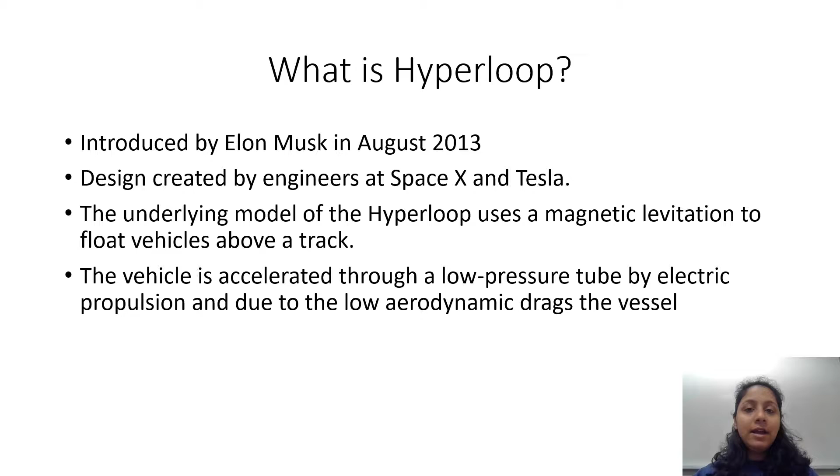The underlying model of the Hyperloop works in a way such that a capsule or a train runs inside a tube. The tube is kept at a low pressure environment by ensuring that there is nothing but vacuum in the tube. Due to low aerodynamic friction present inside the tube, the vehicle is accelerated in a forward direction using the concept of magnetic levitation. I know this sounds completely bizarre, and we all must be wondering how it exactly works. So I have a cool slide coming up next to indicate the conceptual design of Hyperloop.

We all remember watching the Jetsons when we were kids, wherein one of the persons would go inside a tube, as shown on the left-hand side, be inside the tube for some time, and is floated magically to the other side, from one destination to another. Similarly is the conceptual design of Hyperloop. Instead of a person going directly inside a tube, imagine the person is present inside a train and this train runs inside a tube.

Musk recently tweeted that this train or this particular capsule inside the tube can actually run at a speed equal to the speed of sound. I know this sounds completely bizarre, but it's actually achievable. And engineers at SpaceX and Tesla are working in order to achieve such a humongous amount of speed.

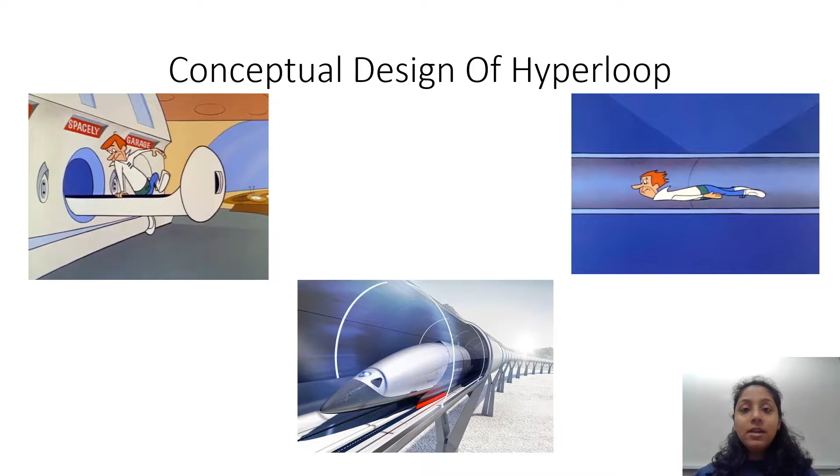One of the reasons why I decided to do a thorough system engineering analysis of the Hyperloop mode of transportation is due to the numerous advantages associated with Hyperloop. The first one is efficiency. Hyperloop claims that it is the most efficient and quickest mode of transportation available for daily commuters. Let's compare it to the other modes of transportation that are available.

How about airplanes? Let's say we want to travel a distance of 900 miles. Traveling by airplane is going to be completely unfeasible because half of the time would be wasted in the ascent and the descent of the flight. This is not practical for daily commuters like students or office-going people who want to be as time efficient as possible.

The second mode of transportation is railways. The biggest issue associated with railways is that it stops at every destination possible. Thus, let's say in a crowded place on a daily basis, if passengers travel from place A to B, ensuring that they stop at every possible place between A and B is not going to be feasible. And this is what Hyperloop claims is not going to happen with its model.

And the third mode of transportation is roads. Lots of traffic congestion in big cities like Los Angeles, California, or New York. And traveling by roads is not a better option. All these things will be avoided in Hyperloop, which we will look at further when we look at the proposed route for Hyperloop.

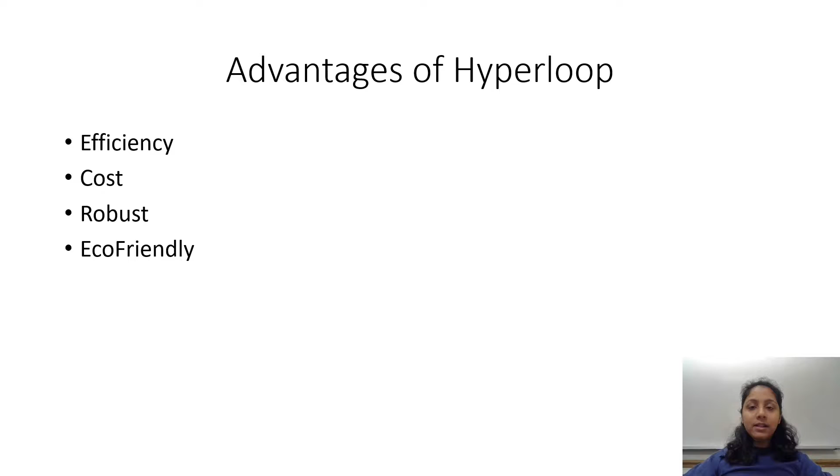And the last and the most important advantage is that Hyperloop is eco-friendly. Since it does not use any fuel for powering its system and works on the concept of magnetic levitation, it is the most eco-friendly solution that's available in the market. Also, solar panels are mounted on the tube in order to ensure that the system is up and running continuously. Now let's look at the energy consumption of all the vehicles in the United States for the year 2017.

If you look at the pie chart in the figure, we see that most of the people, or let's say most of the vehicles here, use gasoline and its distillates for their modes of transportation in order to ensure that the vehicle is up and running, which is nothing but 55% of them use gasoline and 22% of them use distillates, which is almost equivalent to 80% of the population of the entire country only surviving on fuels in order to ensure that their mode of transportation is up and running for the day, which is an increasingly and alarmingly large amount of people. What's the impact of doing this?

A lot of carbon emissions are emitted into the environment, which leads to air pollution and thereby aids global warming. It is the need of the hour to have a cleaner mode of transportation for the future. And this is exactly what Hyperloop claims. We need to consider the energy consumption for designing a transportation mode in order to ensure that it does not impact the environment and complies with nature as well.

As mentioned in the previous slide, Hyperloop works on the concept of magnetic levitation, and it does not use any fuel in order to power the entire system. Further on, it uses solar energy, which is a renewable source of energy, which it stores and consumes for the entire day in order to operate the tubes, the capsules, and the accelerators that are present inside the system. Thus, Hyperloop is one of the cleanest modes of transportation that is available.

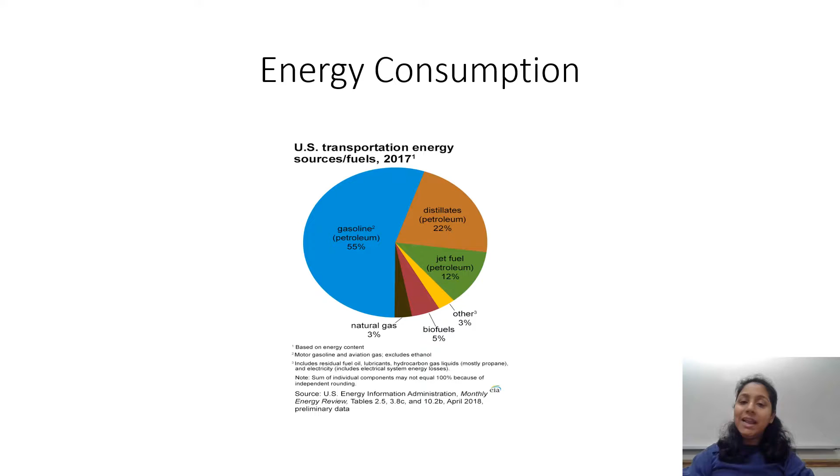I do agree that in case of an emergency, braking is going to be required within the Hyperloop. And we do have motors that will trigger this mechanical braking system. And these motors will be powered by fuels. However, this would occur in case of an extreme scenario and not on a day-to-day basis, unlike the other modes of transportation that rely on fuels on a daily basis for commutation.

Thus, as we saw in all of the previous slides, Hyperloop has numerous advantages associated with it, be it in terms of efficiency, cost effectiveness, robustness, durability, as well as being environment friendly. Thus, it is the next big thing that's out in the market. Compared to the current modes of transportation that lack certain things, which Hyperloop claims it's going to satisfy, it is the need of the hour to develop such a model of transportation.

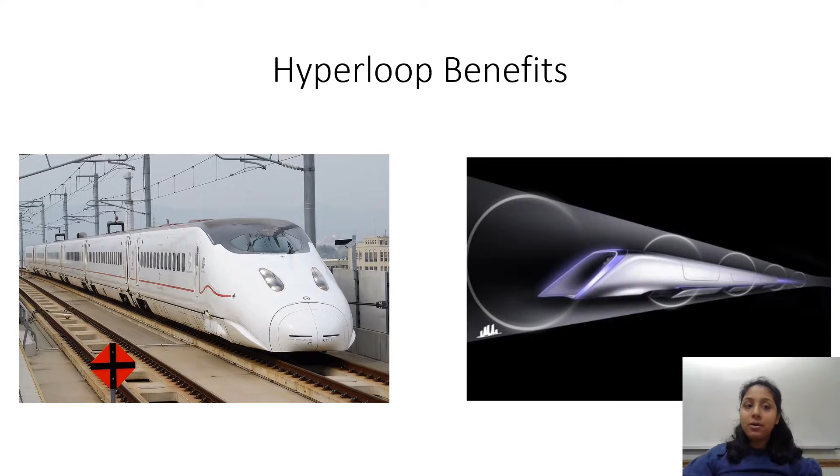Before looking at how my proposed model, Hyperloop, works, let's look at the history of ideas that existed before this model was proposed. It seems that Musk was not the first person to think about air pressure based transportation. This idea was already carved out in the late 17th century with the invention of the artificial vacuum, which led to the development of the underground transit system using pneumatic tubes for transportation.

It was observed that in the mid 1850s, a large number of cities adopted this concept of underground railway transit system with the use of pneumatic tubes. It was convenient as the system is going to be underground and it won't involve construction cost or blocking of roads above the ground level.

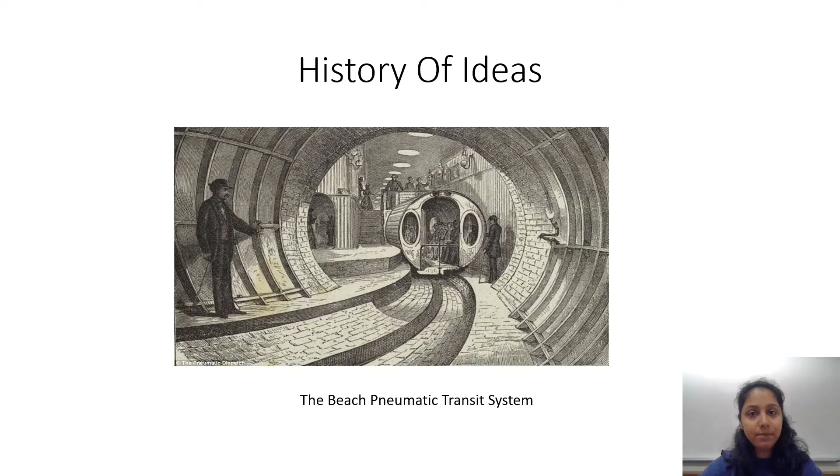In the year 1910, another scientist named Robert Goddard theoretically designed a train that will travel inside a vacuum tunnel.

As you can see in the image, there's a sealed vacuum tunnel which is used to transport a train within the tunnel. He claimed that people can travel from New York to Boston in around 15 or 20 minutes via the solution. This was just a proposed idea, it was never implemented. However, it used a concept of vacuum inside a tunnel as well as pneumatic underground transit system.

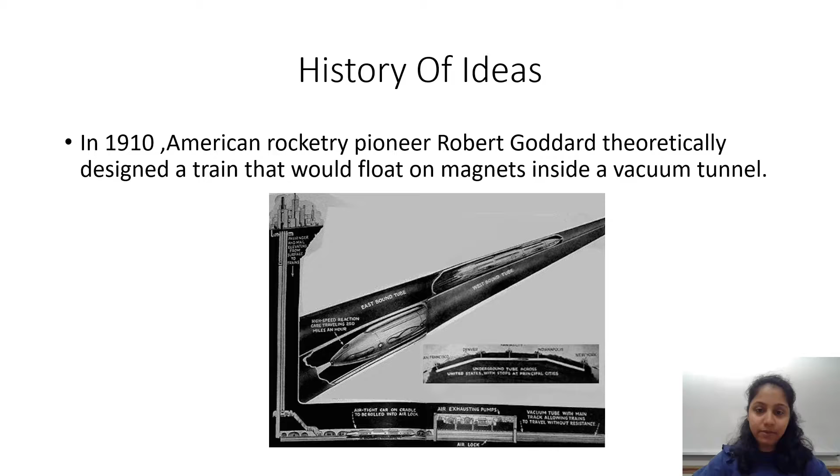If you look at the next slide, in the early 1990s as well, there were researchers at MIT who designed a vacuum tube that runs on a magnetic track. They estimated that this vacuum tube can travel from New York to Boston in around 45 minutes.

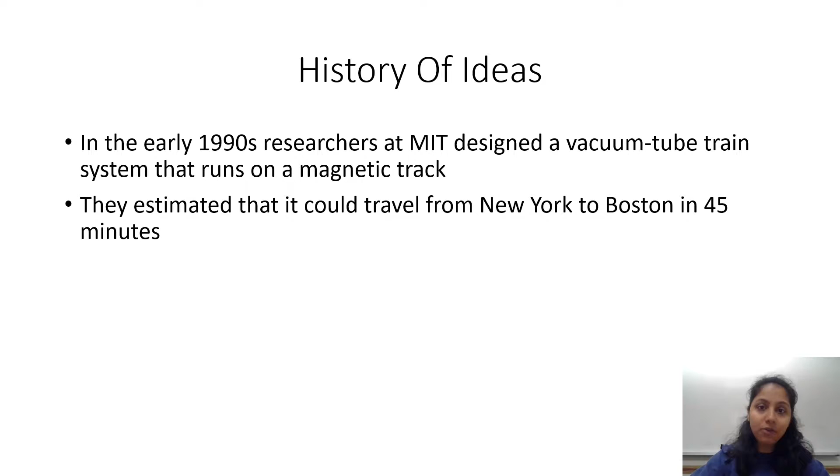In the year 2000, Hyperloop's closest sibling, ET3, came into picture. As you can see in the image, it consists of a car-sized capsule or a passenger vehicle that runs inside a tube which is around 5 feet in diameter, which runs on a frictionless magnetic levitation surface. The linear accelerators which are present beneath the tube, along with the low aerodynamic friction that's present inside the tube, will ensure that the capsule moves forwards.

There are also airlocks and air gaps present at the stations in order to ensure that the motion of the capsule inside the tube is smooth and without any pressure on the passengers present inside the capsule.

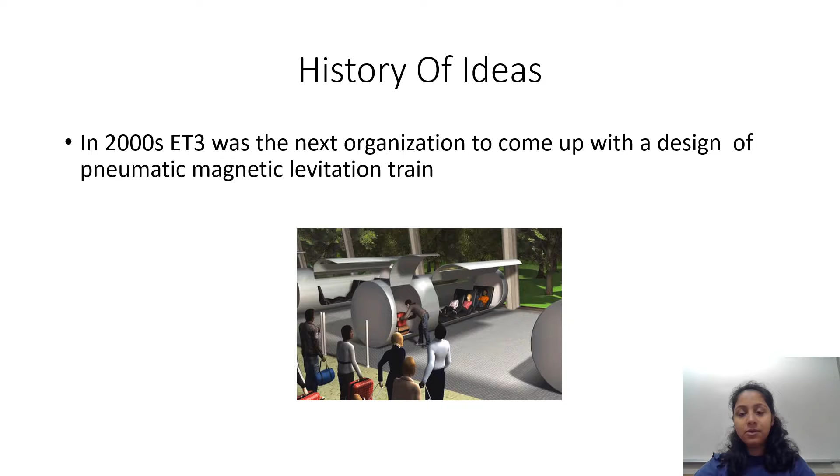The final proposed idea was that of the food tunnel system in the United Kingdom. This idea was proposed in the year 2010, which was an underground system based in the United Kingdom in order to transport the food from one location to another. It was just a proposed idea and it was never implemented. However, it is somewhat similar to the pneumatic transit systems that are present underground. Instead of transporting passengers, it is used to transport your canisters of food.

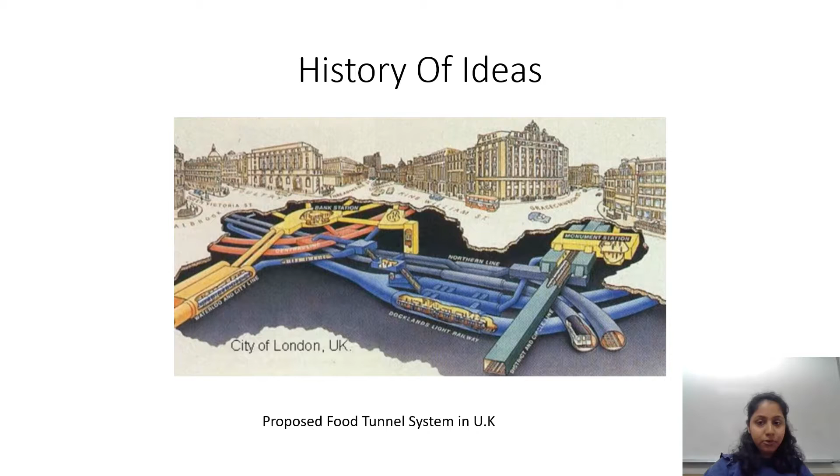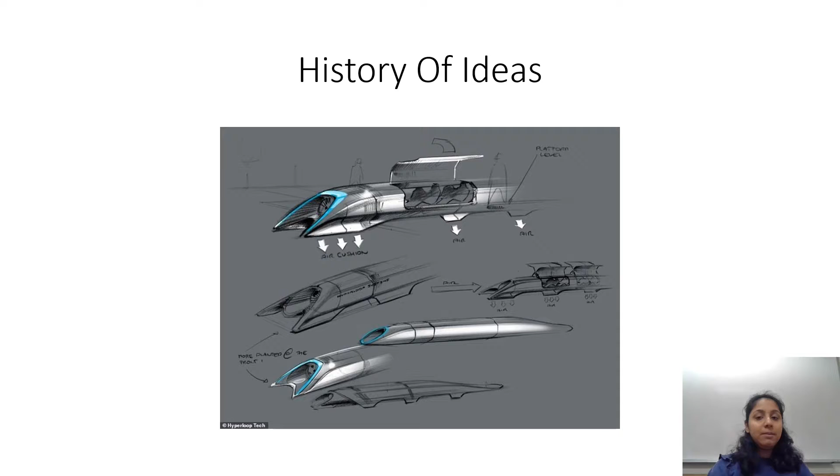Later in the year 2013, Elon Musk published his white paper about his idea of Hyperloop. He claimed that around 28 people can travel in a capsule, which is shown in the figure there, and claims that this capsule can travel from New York to Washington, D.C., and ensure that the passengers reach in about 29 minutes.

The other one is the propulsion system. This system ensures that your capsules, which are present inside your tube, move in a forward direction. It makes use of your accelerators and the concept of magnetic levitation. Your last system is that of a transport system. This system is nothing but your tubes, which contain your capsules and move it in a forward direction. These tubes are huge and need to be erected over a larger area and need to ensure that they are durable and reliable as well.

Thus, your entire Hyperloop model consists of your four systems. Each of these four systems consists of the individual components. Let's look at the mechanical components of your drivetrain capsule system. Your capsule system will consist of compressors, your power system, your air bearing, and your coolants.

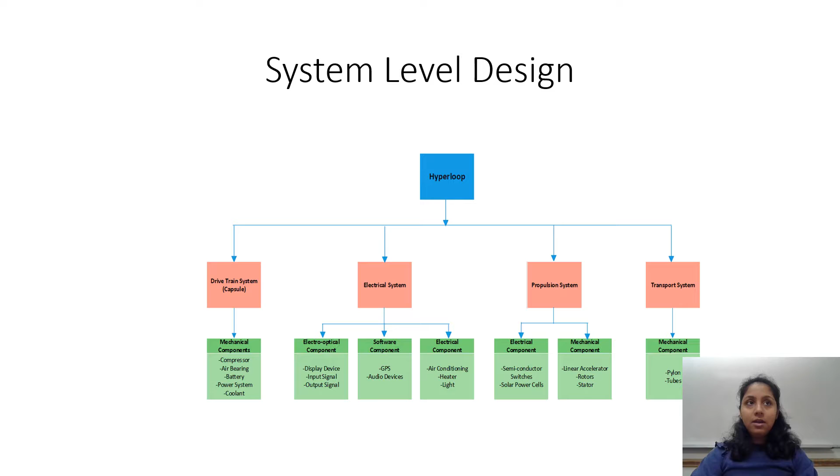Let us now have a look at the first functional system, which is nothing but the drivetrain system. This is your capsule, which is present in the Hyperloop model of transportation. This capsule is used so that passengers can sit within it and it's safe and travels at a very high speed. There are two types of capsule that have been proposed by Hyperloop. The first one is the Hyperloop passenger capsule, and the second one is the Hyperloop passenger vehicle capsule.

What is the difference between both of them? The first one will only transport your passengers, and the second one will transport your passengers along with your vehicles. In case of a Hyperloop passenger capsule, let's say you are during a rush hour. The minimum amount of people that can travel in a Hyperloop passenger capsule is around 28 people. Let's say during rush hour there are going to be 840 people that are going to travel. Thus, in order to think about density and number of people in a crowded area, we will need around 40 such Hyperloop passenger capsules to travel.

Also, let's talk about the air pressure that's present inside the capsule. How does this capsule move at such a high speed? It is similar to the concept of your aeroplanes. When an aeroplane is at a higher altitude, it's present in a low pressure environment. This low pressure environment ensures that there is very minimum drag and it moves at a faster speed. Similarly, the capsules will be present inside a tube which is maintained at a really low air pressure.

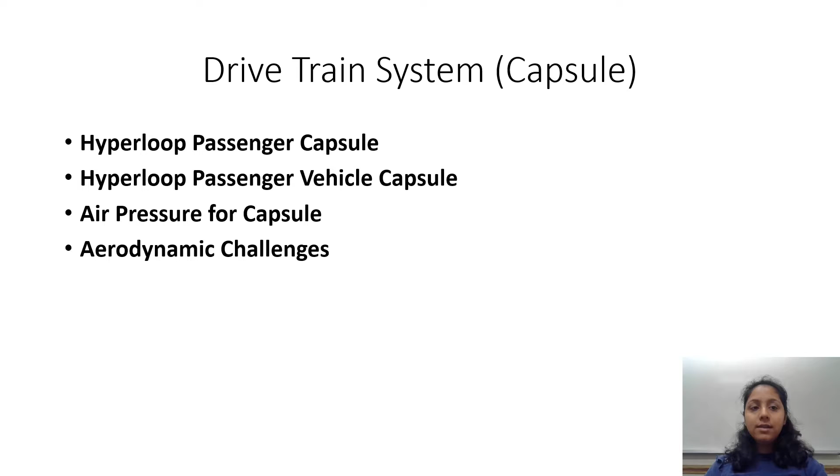However, one thing that we can notice here is that it is completely impossible to have a perfect vacuum or no air pressure. This needs to be addressed. As well, when we are near cities, we can't have the capsule moving at an extremely high speed and we need to lower the speed during such scenarios. This is one of the aerodynamic challenges that is present for a capsule when it nears small cities or big cities.

Let us now look at the model of a drivetrain system. It consists of five important aspects. The initial one is the front section, which is nothing but the inlet. The second one is a compressor. The third one, which you can see in the middle, is nothing but the seating area. The fourth one is nothing but the suspension, which is beneath the capsule. You can see it's down. And the last section is nothing but the batteries, which is at the utmost right hand side.

So, what makes a capsule such a fast and efficient mode of transportation is ensuring that the frontal section of the capsule is minimized. As you can see, the frontal section of the capsule is narrow and it's minimized. And how does this work basically? When your capsule is running at a very high speed inside a narrow path or a tunnel, any incoming air will be ingested by a compressor fan, and it ensures that there is minimum drag or pressure and it travels at a higher speed. The justification for why a compressor fan is used inside a capsule will be mentioned in a short while.

If you see, there are seats present in the middle section. These seats are designed in such a way that even during high speed transportation, the comfort of your passengers will always be met. At the same time, you can see suspension and batteries in the end section.

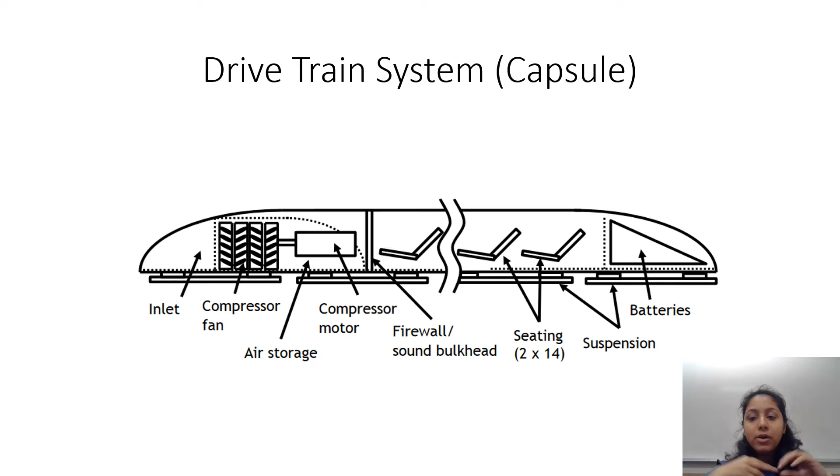You need to always ensure that the frontal area is minimized so that it can navigate at a really high speed. If you look at the bullet trains in Japan or any fast moving mode of transportation, the frontal area in such models is always minimum or towards a pointy edge, so that when it's traveling at a really high speed and cutting through air, the air pressure released in a low pressure environment can be minimized by using a compressor motor and can be used for supporting the entire vehicle. And that's the same concept that is being used for the capsule drivetrain system here.

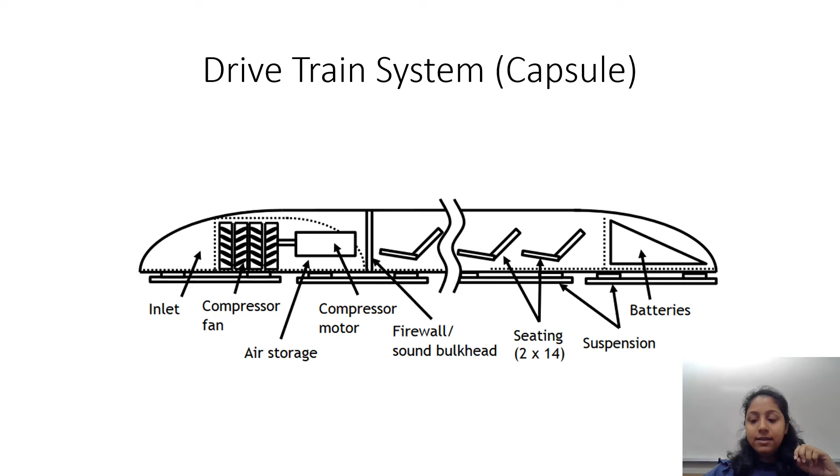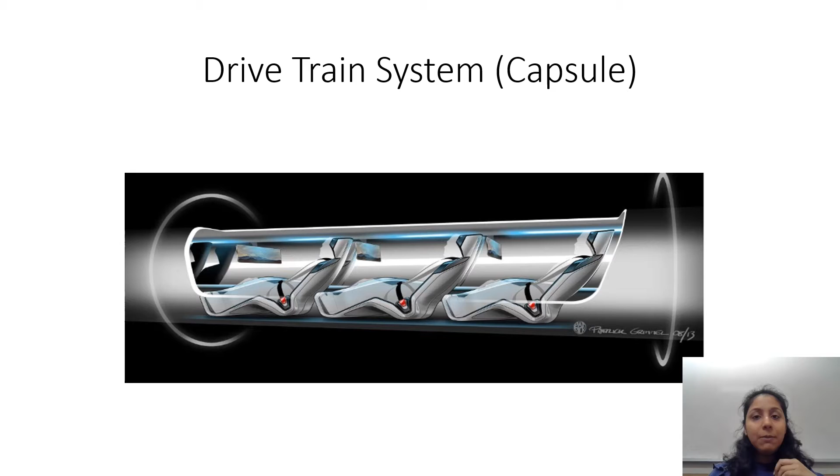Now let's discuss the propulsion system. The propulsion system is responsible for transporting the capsule from one destination to another inside a tube. There are four stages in a propulsion system. The first stage is when the capsule needs to move from a speed of 0 to 300 miles per hour when it takes off from a source. The second mode is to keep the speed of 300 miles per hour in case of an ascent. The third one is to increase the speed from 300 to 760 miles per hour for high speed transportation. And the fourth mode is to reduce the speed from 760 to 300 to 0 miles per hour when it reaches a destination, which is called deceleration.

So, how does it achieve this acceleration and deceleration? It is via the use of linear accelerators. And again, the question arises as to why we use a linear accelerator. The first reason is because these accelerators ensure that the capsules are lightweight, it caters to smaller dimensions of the capsules, and also ensures that the production cost is low. So if you see in the diagram, we use two kinds of linear motors: one for the outgoing train and one for the incoming train. These are backed up by switches, which are semiconductor switches, and these switches are backed up by solar power cells.

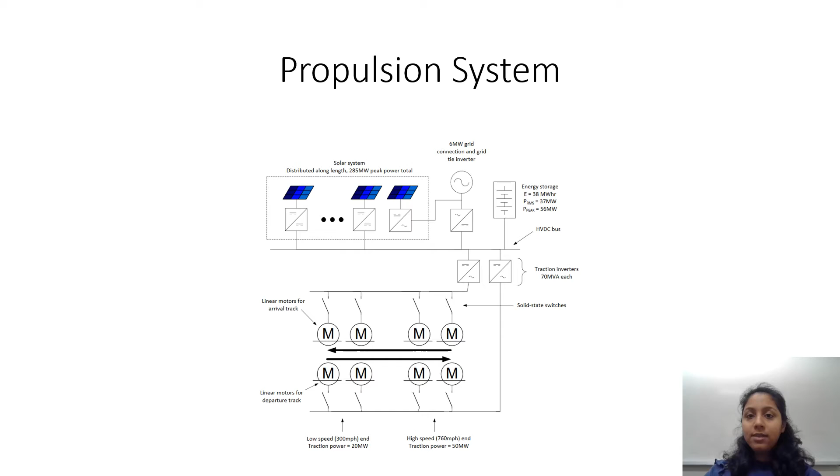The question arises as to why we use these switches. Because we're being energy efficient here. You will only power that part of the track where the capsule is currently moving. So only the solar cells belonging to that part of the track where the capsule is currently moving will be used, and hence we use semiconductor switches for it, which is a very clever and cost efficient trick for saving energy as well.

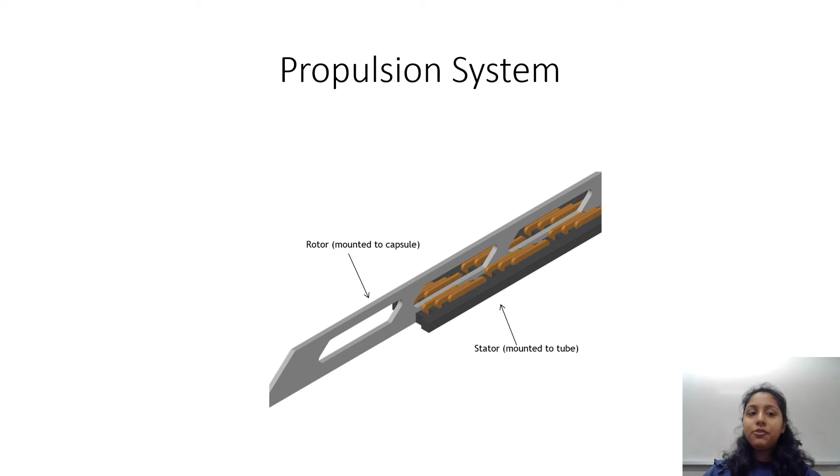Let's look at the interior working of your linear accelerator. It consists of two things. One is your rotor, which is mounted on the capsule. Then there's a stator, which is mounted to the tube. And the trains run between these rotors and stators. There's an air gap, as you can see, between both of them, which induces electromagnetic induction, which further produces your magnetic levitation.

Let's talk about the third system, which is the tube system. The tube system is used to contain your capsules. It is claimed that the pressure inside the tube system will be one-sixth of the pressure present on Mars.

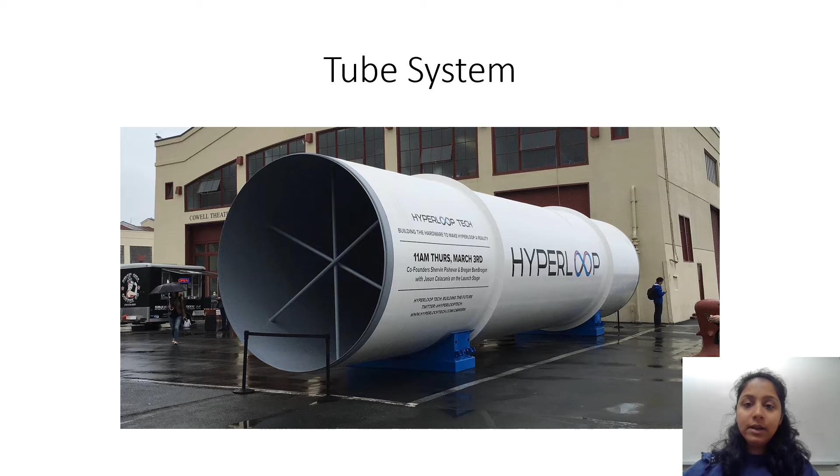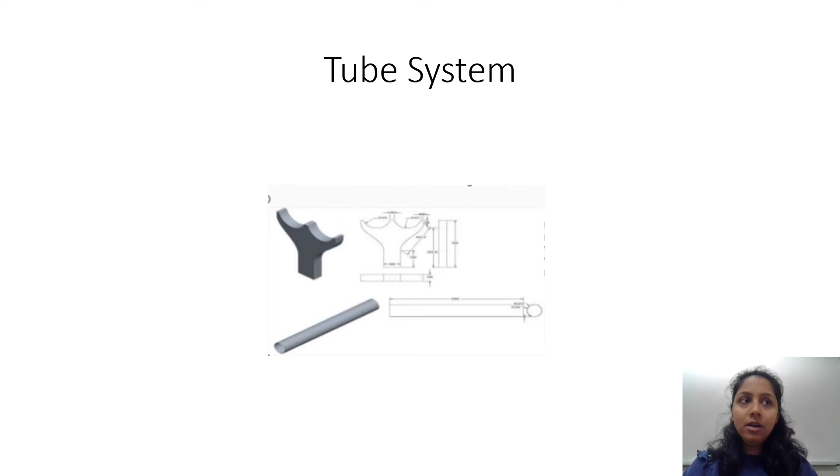In order to ensure that your tubes are mounted correctly above the ground level, we have two structures within your tube. One is that of your pylons and one is that of your tubes. Your pylons, as you can see, are on the upper side and the tubes are below. They are constructed in such a way to ensure the thermal expansion factor of the tubes as well. In case of an extremely hot environment or heating conditions, these tubes can expand and that needs to be taken into picture. Hence, the pylons should be constructed in a cost efficient and an optimal way as well.

As you see in the next slide, this is a proposed model for your pylon along with your tube construction for the Hyperloop. We discussed the analysis and the design of your functional system and the components.

Let's talk about the production cost for Hyperloop. The cost for Hyperloop depends upon the three most important functional systems of the Hyperloop: the cost of a drivetrain system, your tube system, as well as your propulsion system. Among the three of them, the tube system is the one that costs a lot because you're supposed to have an engineering marvel in order to ensure that the tubes are placed properly above the ground level, taking all factors into consideration, which gives it around 5.4 billion USD cost. That for your drivetrain system is 54 million USD, and 350 million USD is associated with your propulsion system, which ensures that the cost of your entire Hyperloop model is going to be around 6 billion USD.

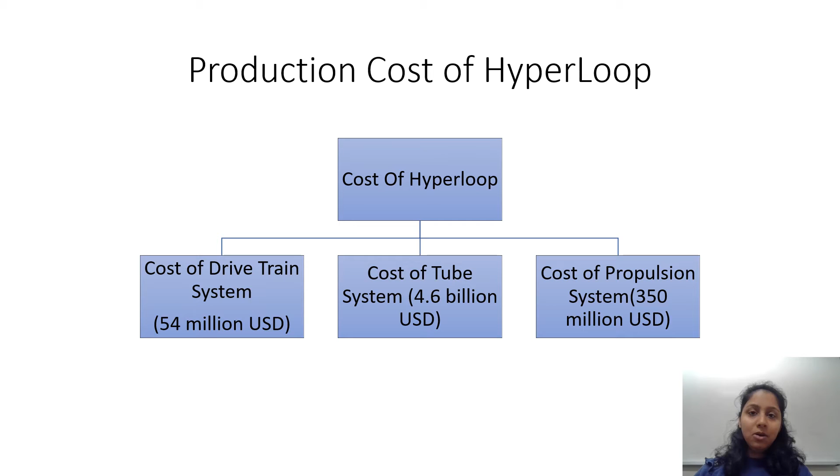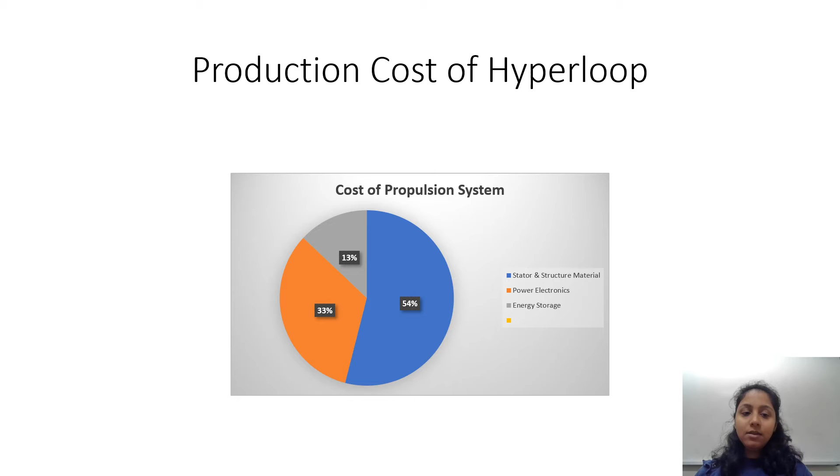Let's look at the cost of a propulsion system. In a propulsion system, the majority of the cost is associated with your stators, which will be mounted below the tube. Your power electronics amount to a minimum of 33%, which is used for giving battery backup, as well as semiconductor switches for switching and ensuring only a particular part of the track is being charged, and your energy storage, which is nothing but solar power cells. As you remember, there were rotors that were also being used in your propulsion system. However, the cost is minimal and doesn't amount to a lot.

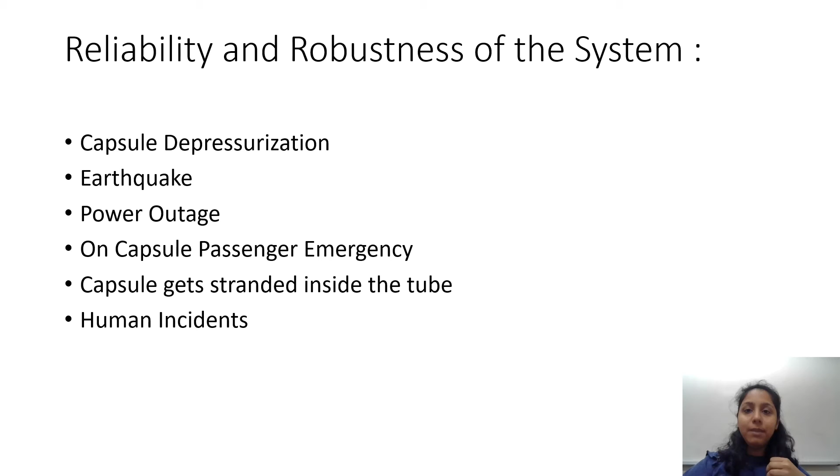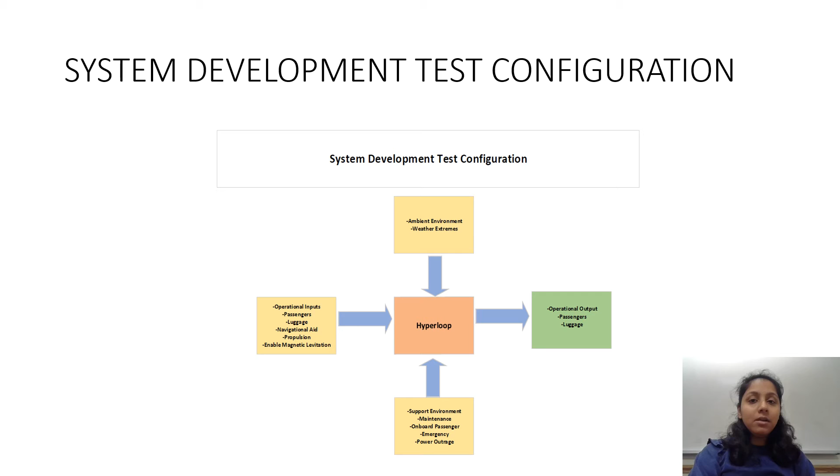And the output of your system development test configuration should be your passengers and luggage being transported from one destination to another in a proper way. So testing with these various kinds of inputs gives you a bigger picture and a thorough and complete analysis of the working of your system.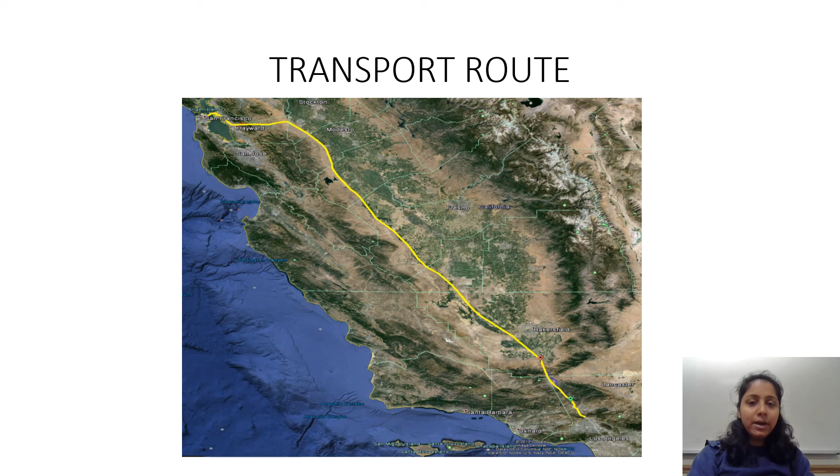The next slide that we talk about is a transport route, which is extremely important for our model since it's a transportation based model. As you can see in the picture, Hyperloop is going to commute from San Francisco to Los Angeles. The reason why these two routes were selected was because they're among the most crowded and most populous cities in the state of California, and daily commuters travel from one location to another via various modes of transportation. So this is the speed that's being shown and the breakup of the speed for your Hyperloop.

From Los Angeles, we're going to have two sections, the south section and the north section. The speed is going to be maintained at 300 to 555 miles per hour. The I-5 section is a direct stretch which contains very minimal bend radii. Bend radii is the section wherein there are no bends across your route, so you can travel in a straight line and there won't be any need to reduce the speed of your capsule inside the tube.

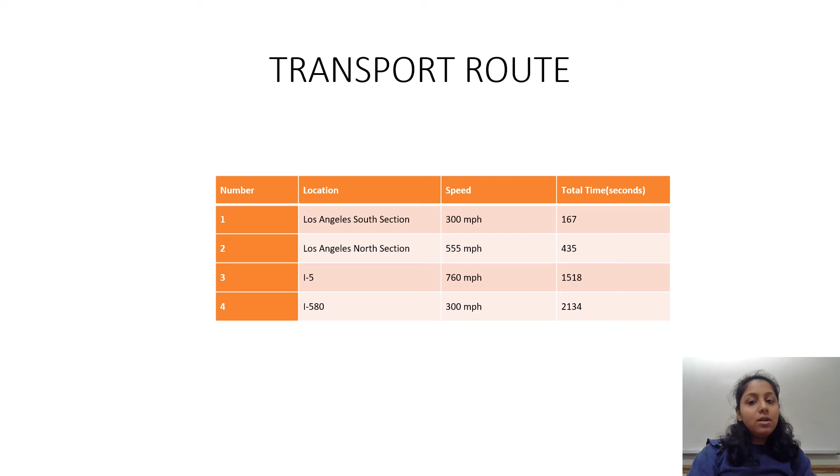Hence, the speed here is maintained at 760 miles per hour, and at the end, your destination, it reduces to 300 miles per hour. The total time is nothing but 35 minutes. This is a suggested transport route that you can see, which includes additional cities which have been decided based upon their population density.

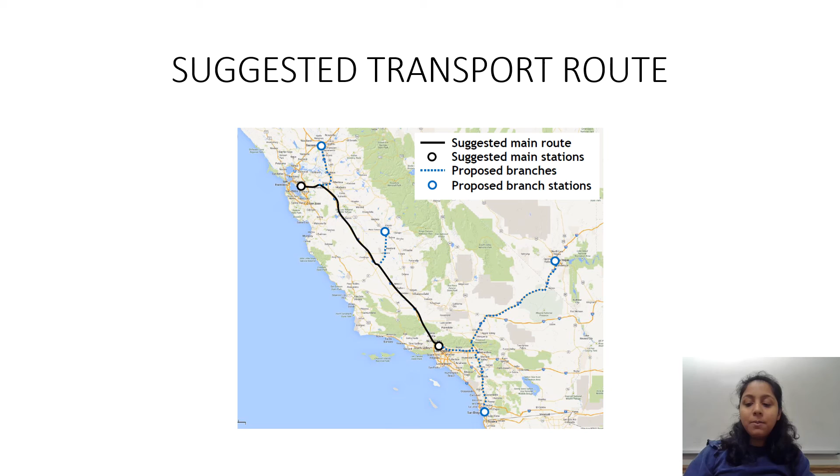The last point of this presentation is discussing the challenges associated with Hyperloop. I have identified four such challenges. The first one is that of robustness. How robust is my system? We claim that the capsule that is present inside the tube runs at an extremely high speed. However, we also discussed that there are going to be existing bend radii within your transport route. As we discussed in the previous slide, bend radii are places where the speed of your capsule or train should reduce from 760 miles per hour to 300 miles per hour.

And to switch from such a high speed to a low speed, we're going to make use of semiconductor switches. Solely relying on semiconductor switches in order to make the switch from such a high speed to a low speed seems like an impractical but not an infeasible idea. However, this needs to be tested really well in order to ensure the system is robust enough.

The second point is that of complexity. How complex is my system? We have designed the system to ensure that there's going to be lower dynamic friction and the capsule moves at a really high speed. Also, when the tubes are placed on the pylons, the thermal expansion factor of the tubes needs to be taken into consideration. However, designing pylons that cater to such specific thermal expansion is a complex task in itself, and such issues need to be addressed at an early stage of development or the concept initialization stage.